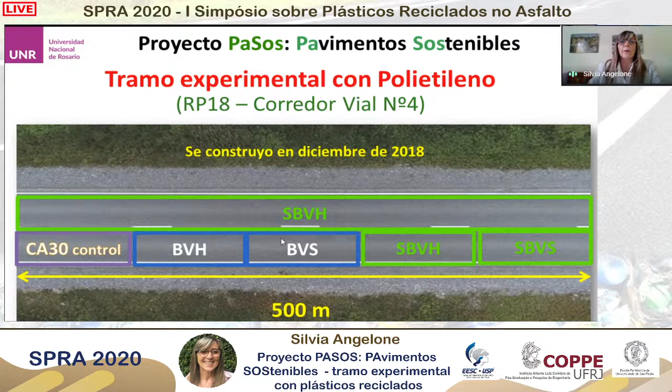Después se hizo un tramo con bidones por vía húmeda, bidones por vía seca, silo bolsa por vía húmeda, silo bolsa por vía seca. La mano esta, que tiene todos los tramos, es la más pesada, la que va con mayor tránsito, la que va hacia la ciudad de Rosario. Y la otra mano, los 500 metros de este otro lado, se hicieron todas con silo bolsa por vía húmeda. Cabe destacar que nosotros no hemos cambiado nada el diseño que tenía originalmente la empresa, sino que lo que cambiamos fue la cantidad, digamos, el tipo de bitumen que estábamos poniendo.

La planta es una planta chica por pastones, tenía un molino a pie de planta para poder modificar el asfalto, terminadora, y teníamos compactadores que después vimos que eran insuficientes, como lo dijeron anteriormente.

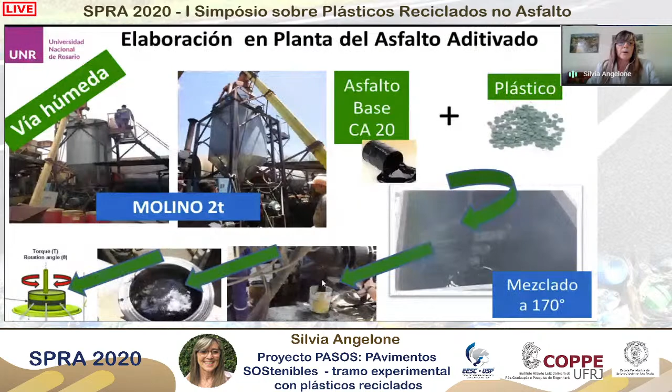¿Cómo se hizo por vía húmeda? Acá tenemos el molino de 2 toneladas, se le ponía el asfalto base, se le agregaba el plástico en pellets, se lo mezclaba a 170 grados con una mezcla, no era una agitación muy grande, y una vez modificado era totalmente bombeable, no teníamos problema de incorporarlo directamente en la planta de mezclas asfálticas. Se tomaban muestras y se hacían los resultados.

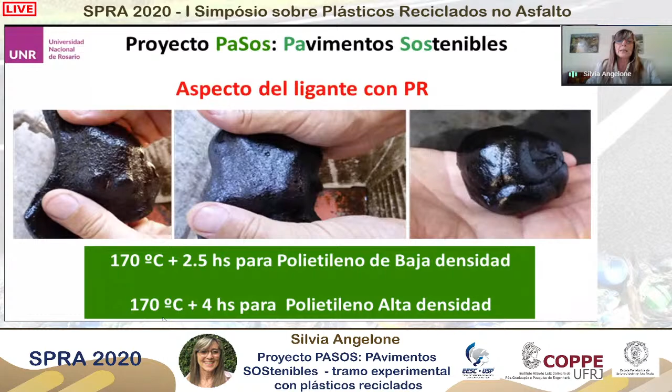Como no sabíamos qué tiempo de agitación le teníamos que dar, lo primero que hicimos fue ir probando, primero a la media hora, a la hora, y así íbamos viendo si estaba totalmente homogéneo o si se veían los pellets. Seguíamos agitando hasta que quedaba totalmente uniforme y homogeneizado. Esto llevó a que el polietileno de baja densidad llevara 2 horas y media de agitación y el de alta densidad llevara 4 horas.

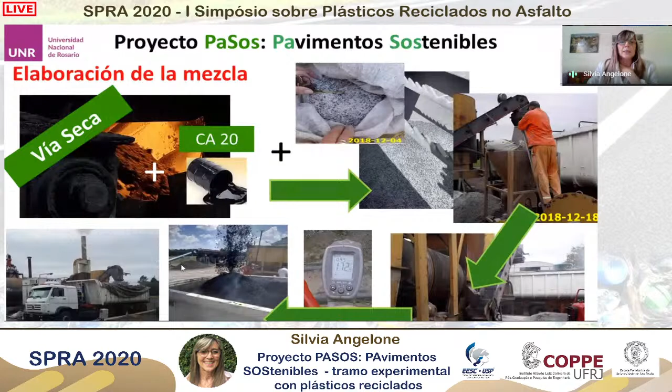Cuando elaboramos por vía seca, se hizo primero la mezcla del agregado pétreo con el asfalto, y la mezcla del filler con el plástico se puso en la tolva del filler, que se incorpora al final. No se le dio más tiempo de mezclado que se le da habitualmente. La mezcla se elaboró a alrededor de 170 grados y estaba totalmente envuelto, totalmente incorporado el plástico a la mezcla. Y así se llevaba a in situ, donde se pudo distribuir bien, se pudo compactar.

Acá tenemos que ver algunas precisiones de la experiencia que hicimos. Es muy importante la temperatura, es importante que no se enfríe, mantener esa temperatura. Una de las cosas que no logramos es que queríamos espesores entre 40 y 50 milímetros y no lo logramos, se lograron espesores más bajos, con lo cual la mezcla se enfriaba rápidamente.

El primer tramo que se hizo fue con silo bolsa por vía seca. Tenían la gente muchas dudas y entonces la última parte del tramo quedó frío y eso hizo que la compactación no fuera tan efectiva.

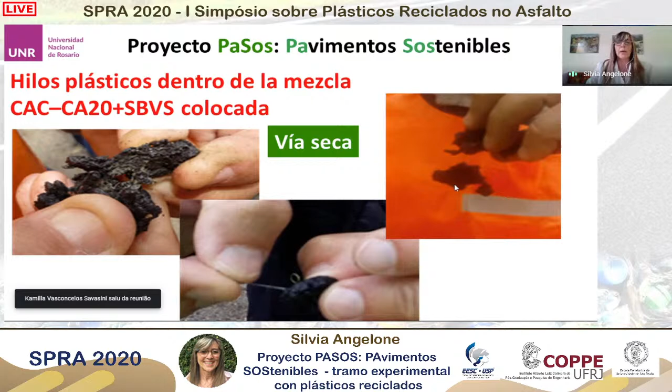Lo que veíamos cuando pusimos la mezcla por vía seca es que tomando la mezcla de la terminadora, uno podía observar hilos del plástico dentro de la mezcla. O sea que en sí no está totalmente fundido, sino que está incorporado dentro de la mezcla, pero no se veían los pellets. Lo que se veían eran estos hilos.

Vamos a ver entonces ahora los ensayos. Dijimos que habíamos hecho silo bolsa, que es de baja densidad, bidones, que es polietileno de alta densidad, y para comparar hicimos lo que teníamos por laboratorio, que es un micronizado. En experiencias anteriores hemos visto que cuanto menor es el tamaño del plástico que se incorpora, este se incorpora más fácilmente tanto al betún como a la mezcla.

¿Cuál es el problema del micronizado? Es que, como dijeron en la presentación anterior, cada etapa es plata, cada etapa tiene un costo. Entonces, micronizar es un costo extra, una energía extra que se le agrega al producto. Por lo tanto, lo ideal sería usar los plásticos reciclados directamente, triturados en forma de escama, nada más que lavados, y ni siquiera en forma de pellets, lo que tiene el pellet es que es mejor para transportarlo, es mejor para incorporarlo en la obra.

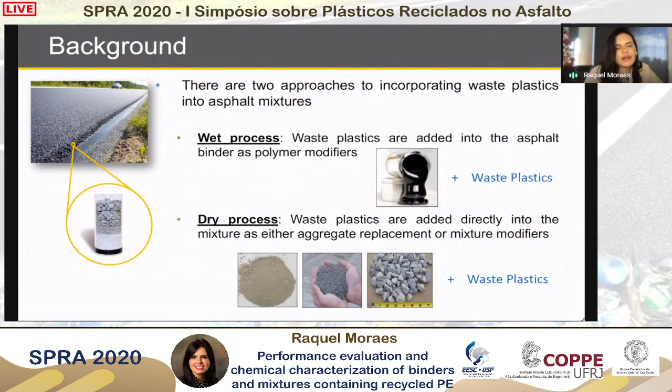So a little bit of introduction. I'm pretty sure that you have been seeing this over and over during this symposium, but I think it's a good way to introduce what I'm going to speak about today. There are two processes where we can incorporate waste or recycled plastics into the asphalt pavement. One is the wet process, where basically we are adding the waste plastics as modifiers to the binder component, and the dry process, where we are adding the waste plastics directly into the mixture as either an aggregate replacement or a mixture modifier. And today, this research will be focused on the wet process.

When we use the wet process for incorporating recycled polyethylene in asphalt, we have some limitations and some challenges. And the most common issue that we face over and over in the laboratory is the phase separation between the two components. And this phase separation happens because of the inherent incompatibility between the two components. And due to this incompatibility, the resulting mechanical properties of the modified binders are affected as well, and therefore the overall performance.

And when we are trying to evaluate this type of material in the laboratory, what we have to consider is this as a pseudo-binary system, where we have two components, and the final performance of the material will therefore be dependent on the intrinsic characteristics of both materials, as well as any chemical and physical interaction that occurs between both components.

So to have an overall picture of why this incompatibility process is so important and so visible in terms of the results and properties that we collect in the lab, we can see here the factors that play a role in the compatibility between the asphalt binder and the recycled plastics. We can see that solubility parameters, thermodynamics, and separation kinetics will dictate the overall microstructure of the asphalt waste plastic systems, and therefore we will see a significant effect on the modified properties of the resultant binder.

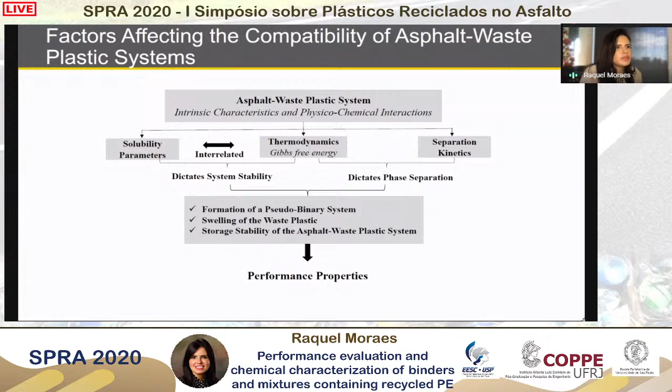The overall objective of this research was to characterize the chemical and the rheological properties of the asphalt binders that were modified with the recycled polyethylene, and also modified with a reactive elastomeric terpolymer, henceforth called RET, that was used as a compatibilizer and performance enhancer of the recycled plastic in the asphalt binder.

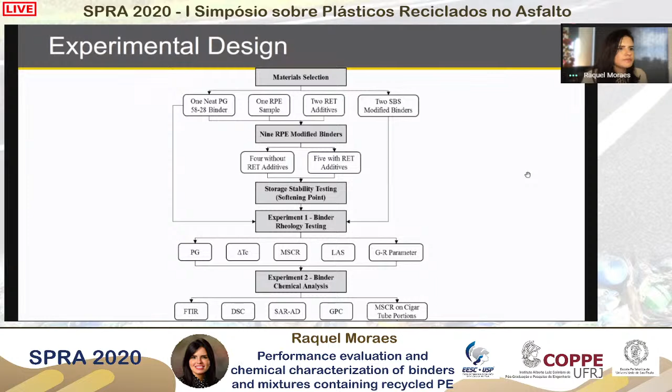Then we have two ethylene-based RET, that is a terpolymer, that were used as compatibilizers to mitigate the phase separation between the recycled plastics and the asphalt binder. And for comparative purposes, in terms of performance, we have two SBS modified binders that were included in the study. One was formulated with 2.4% linear SBS, giving us a final PG of 64-28. And the second one contains 4.2% of linear SBS polymer with a final PG of 70-28.

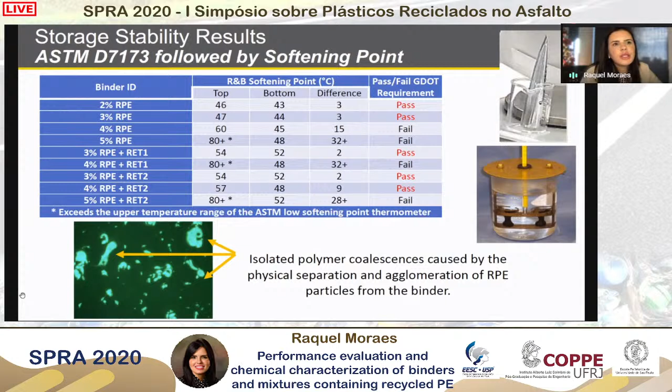And as you can see here in the green picture, we have a UV microscope micrograph, and we can see the very bright green parts that are indicated with the yellow arrow. These are isolated polymer coalescence that were caused by physical separation between the binder and the plastics. And this is for the blends with 5% of recycled polyethylene. So you see, you do not have dispersion of this material within the asphalt binder whatsoever.

And then another way we decided to evaluate, and this was done at WRI, was: okay, we have the cigar tube storage stability test, and before we evaluated using the softening point. But now we want to see something that is not so empirical. Let's rely on the DSR to evaluate the rheological properties of the binder. So we performed the MSCR test on the top and bottom portions after the storage stability test.

And here, as illustrated in the graphs on the left and the right side, you can see that the gray columns are top and the orange columns indicate the bottom samples. We can see that both the neat binder and the terpolymer modified binders had very similar Jnr and percent recovery values for the top and bottom samples.

However, the binders that were modified with the recycled plastics and with the recycled plastics plus the terpolymer showed lower Jnr and higher strain recovery between the top and bottom samples, which is an indication of polymer separation. And also from these results, we can see that by adding the terpolymer to the binder modified with recycled plastics, we can decrease the severity of phase separation, but we cannot completely mitigate the problem.

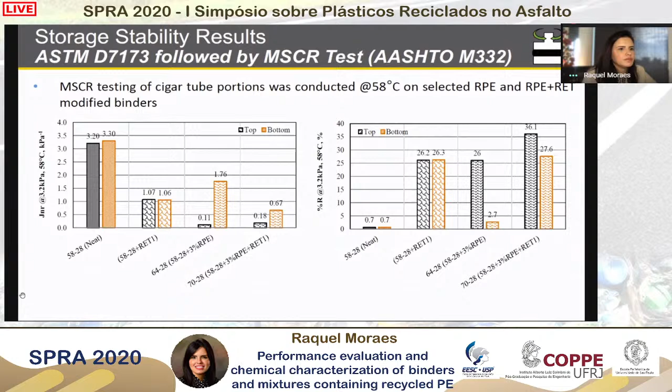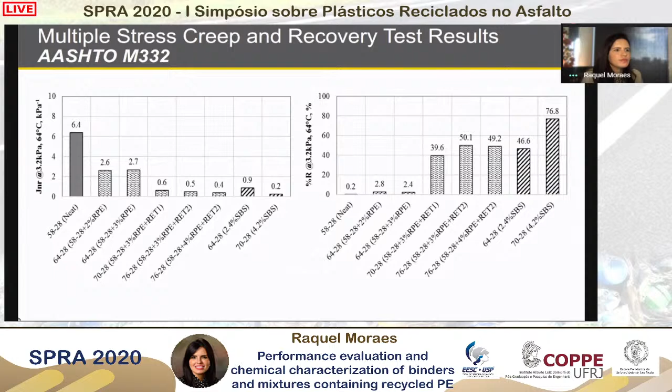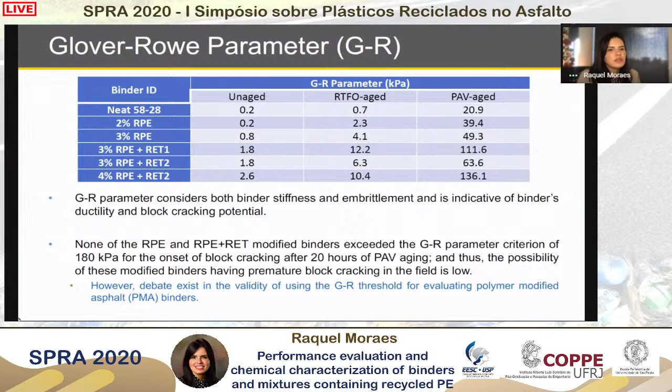And therefore, based on this criteria, we can assume that these binders have a low probability of having premature block cracking in the field. However, we have to have a careful approach on that, because with modified binders, we need to be careful when considering the limits that we have so far.

And here we have the same Glover-Rowe parameters that we show on that table, now plotted in a Black space diagram, where we have complex modulus on the y-axis and the phase angle on the x-axis at 15 Celsius and 0.005 rad per second. We can see that in comparison of the recycled polyethylene modified binders and the recycled plastics modified binders containing the terpolymer, we have similar stiffness, G star, but we have lower phase angle, which then results in the horizontal shift of the data to the left of the diagram.

I'm pointing here in the air, trying to show on the screen.

And again, it's important to highlight that none of the evaluated samples fell within the damage zone. They are indicated by the dashed and bold line. And on the right side, we have an aging index calculated considering the Glover-Rowe parameter, considering the short-term aged binders and long-term aged binders.

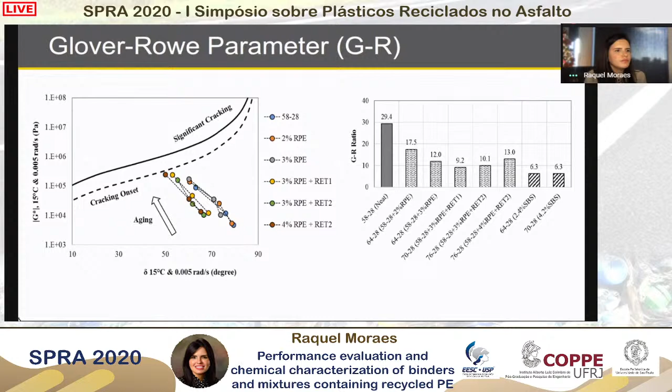And then we move forward with the differential scanning calorimetry, the DSC results. What I'm going to be presenting from the results that we captured using the differential scanning calorimetry is the crystallization. And why is this so important? Well, we know that when we have materials that have a high wax content, we have very different rheological performance. And by adding the recycled plastic, we can be increasing the overall resin content in the binder, therefore increasing the content of wax and changing completely the rheology of the material.

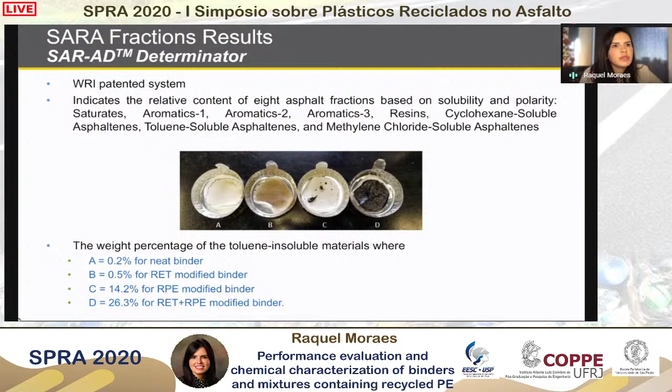So from these SARA results, as I mentioned previously on the picture, we have in the last columns the content of insoluble materials, where we can see that a significant portion of the blend that contains the recycled plastics is considered insoluble. And then we can see the overall SARA fractions for all of the 4 binders. But one thing that is important for us to see is that these results could be used as an indication that the storage stability test alone does not directly represent the evaluation of the chemical compatibility of

the polymer modified binders. You remember that these samples were selected after initial screening of the storage stability test using the softening point, where we see that the binders passed the initial screening in accordance with the Georgia DOT specification. But when we come to a more detailed or more intrinsic evaluation of the material, we can see that test does not cover everything, as we can see here from the amount of insoluble materials that we have in the blends with the recycled plastics.

Let me run. So as we can see over here, by the overall molecular size distribution curve, the modified binders are showing a lower overall molecular size distribution in comparison with the base binder, which we know is unrealistic because of the molecular weight of the polymer that is being added to the binder. So care needs to be taken when we're doing analytical analysis of the material modified with recycled plastics, since the solvents that we use for evaluation cannot completely dissolve the recycled plastics.

And then another evaluation that we made with this material was using the binder bond strength test to evaluate compatibility with aggregate and also moisture susceptibility. And here's a schematic of the BBS, and since I'm running out of time, I'm going to try to move fast through the results.

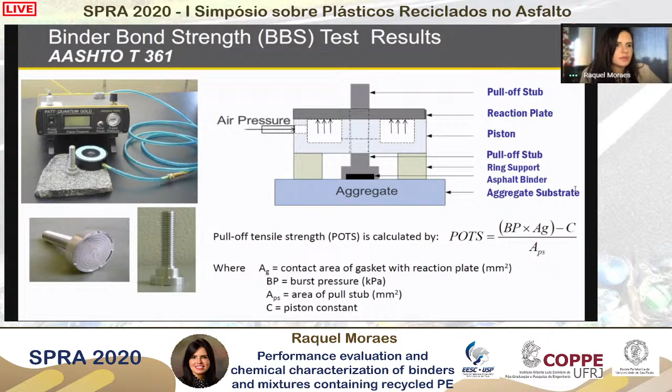The first results that we have over here are the effect of aging on the bond strength of the recycled plastics. We have POTS results that were collected with the BBS unaged, that is original binder, and after PAV. And we can see that a higher POTS value, or a higher bond strength, is observed after oxidative aging. One explanation for that is the carboxylic acids that are present in the asphalt binder, which are increased because they are products of oxidation, and they are quite polar.

Modifying binders are showing smaller dry bond strength. We evaluate the BBS after the samples, submerged in a water bath for 48 hours, before and after aging. We can see a significant decrease in bond strength before and after aging, when considering moisture conditioning.

This is because the carboxylic acid groups developed with oxidation are favorable for the dry state, but unfavorable when we consider moisture conditioning, since they can be removed very easily in the presence of water. This effect is more accentuated for the binders modified with recycled plastic by itself.

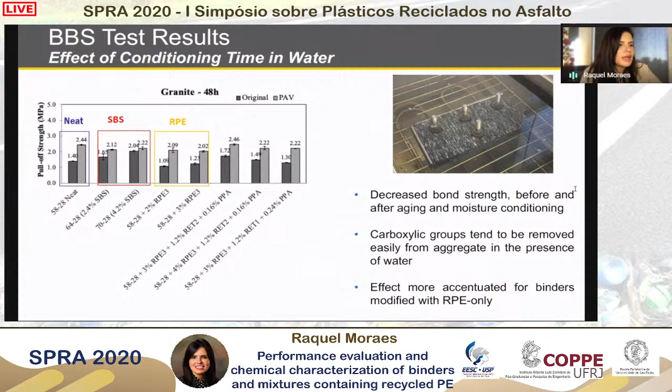We also can see here the overall loss of bond strength, meaning the ratio between before and after moisture conditioning. Samples containing recycled polyethylene by itself are more susceptible to moisture damage after oxidative aging, compared with samples modified with the terpolymer.

Samples containing the terpolymer contain PPA, polyphosphoric acid, used as a catalyzer in this blend. PPA is known to react well with granite aggregates, therefore improving the overall moisture susceptibility of this type of blend.

We also evaluated the relationship between the BBS results and FTIR, where a higher loss of bond strength was observed for binders with higher carboxylic and sulfoxide area, as mentioned before. This effect was much more accentuated for binders containing recycled polyethylene by itself.

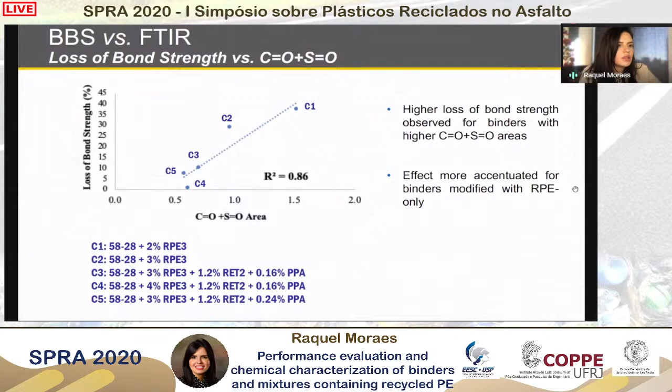So the overall conclusions of the experiment, briefly: a higher percentage of recycled polyethylene will not give us a passing criterion according to the Georgia Department of Transportation, and softening point testing results after storage stability can be misleading.

Therefore, the MSCR test is a more reliable way of evaluating polymer separation after cigar tube storage stability.

We can see that with 2 and 3% recycled plastic, we increase the stiffness of the binder overall, and therefore the overall rutting resistance, but no positive effect was detected regarding low temperature cracking and fatigue cracking.

The DSC test was found to be a useful tool for evaluating recycled polymer modified binders, where we can detect melting temperature, glass transition, and the amount of crystalline fractions.

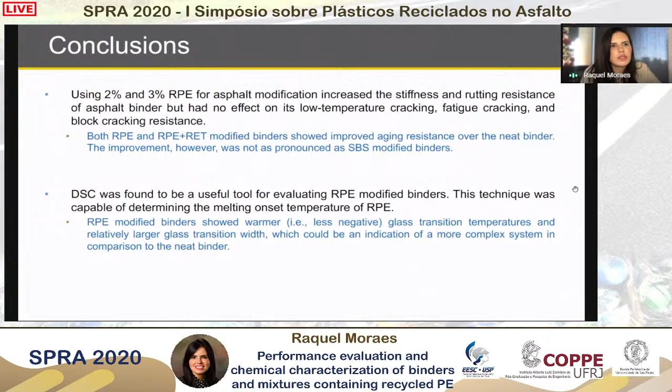Lastly, I'd like to mention another very interesting study we just finished. In this study, the recycled plastic was not added to the binder directly, it was added to the mixture through the dry process.

We wanted to evaluate whether, even when recycled plastic is added using the dry process, this would have any impact on the rheological properties of the binder. That's what the study was aimed to achieve.

Our hypothesis was that the interaction existing between the asphalt binder and the recycled plastic can affect the overall performance of the mixture, even though it's constructed using the dry process.

The whole hypothesis is that during mixing, the aggregate shear motion will result in incorporation of the recycled plastic into the asphalt binder, and the degree of this interaction is unknown.

But if an interaction exists, it will result in changes to the rheological properties of the binder that could be captured after extraction and recovery.

One concern everyone has is regarding the solubility of the recycled plastic in solvents commonly used, and our capability of recovering the recycled plastic during the extraction and recovery process.

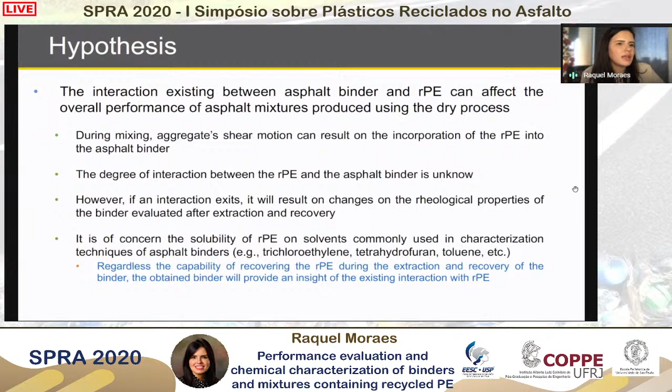For this experiment, we used the exact same recycled plastic discussed previously in the binder and chemical analysis. You can move forward, Jack.

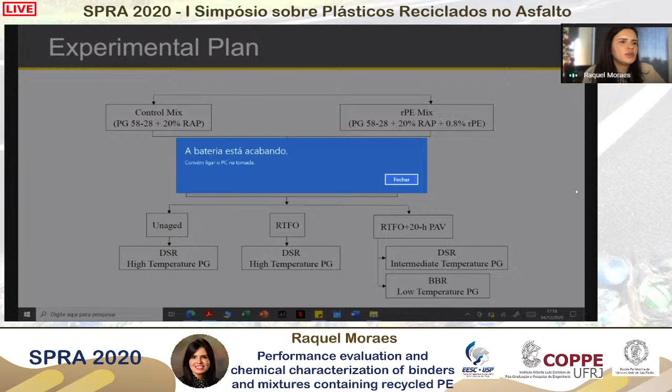Here we had a control mix, a PG58-28 binder containing 20% RAP, and a recycled polyethylene mix containing a PG58-28 binder, 20% RAP, and 0.8% recycled polyethylene. From these two mixes, we used extraction and recovery to obtain the binder.

From the resulting binder, we evaluated the material as unaged, RTFO, and long-term aged on PAV, and I'm going to discuss the results.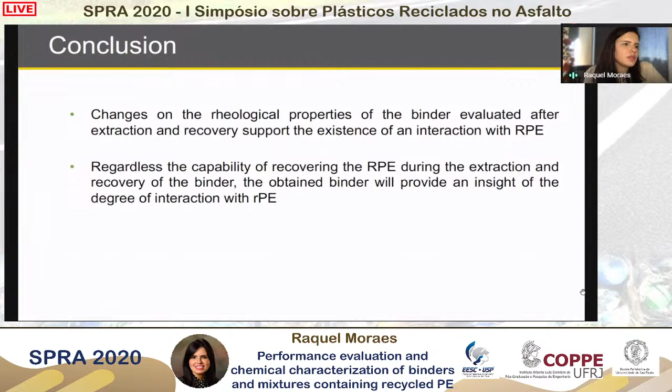Therefore, we can conclude that the change in the rheological properties of the binder, evaluated after extraction and recovery, supports the existence of an interaction between the recycled plastic and the virgin binder, even though the incorporation of the plastic was through the dry process. Regardless of the capability of recovering this recycled plastic during the extraction and recovery of the binder, the obtained binder will always provide insight into the degree of interaction with the recycled plastic. And with that, I conclude today's presentation, and sorry if I went over the time.

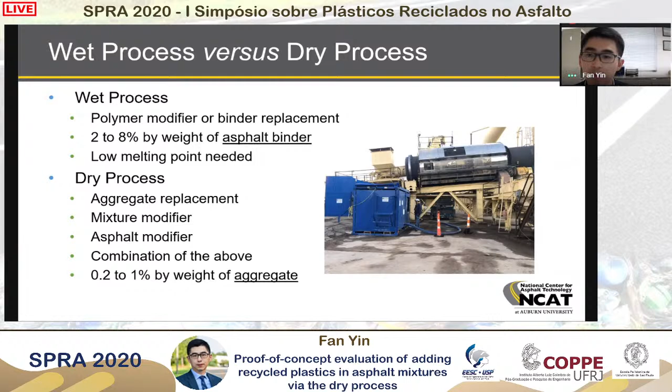Overall, the dry process can accommodate more recycled plastic for use in asphalt mixtures. I'd say India is definitely the leading country on using the dry process of adding recycled plastics. Reportedly, they have almost 15 years of experience with this process, using LDPE, HDPE, and PET in this type of application.

The concept they are pursuing with the dry process is what they call plastic-coated aggregates. This means adding recycled plastic into the hot aggregates. Because of the high temperature, the plastic melts and coats the surface of the aggregate. By doing that, they can improve the mechanical properties of the aggregate, including increased toughness and abrasion resistance, and the plastic films can also reduce water absorption and asphalt absorption during mix design.

There's literature showing that plastic-coated aggregate can improve mixture resistance to rutting, moisture damage, and fatigue damage. We talked with some contacts over there, and it seems they have constructed over 1,500 miles of local roads with this technology. But the long-term performance data of those field projects remains to be determined. About 7-8 years ago, the Indian Roads Congress established a specification focused on the dry process of using recycled plastic in asphalt.

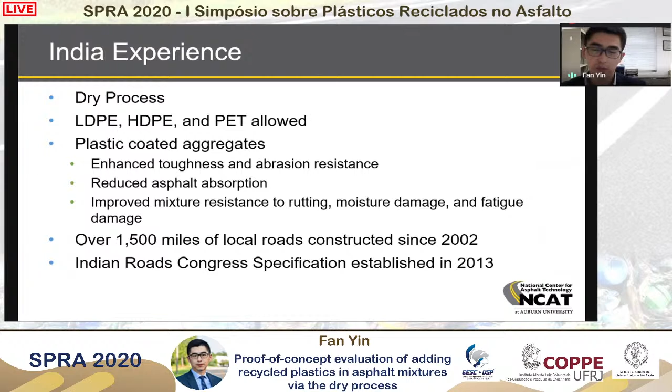So what happens to the mixture when we add plastic into the mix using this dry process? Through literature review, we found that many researchers use Marshall stability as the performance measurement of pavement performance. Those studies consistently show that adding recycled plastic can increase the Marshall stability.

Based on this observation, some researchers have indicated that, because of higher or increased Marshall stability, adding recycled plastic can provide longer lasting pavements. But we know this conclusion may not be well supported, because based on research done over the last 20 to 30 years with Marshall stability, we know there isn't a really good correlation between Marshall stability and rutting resistance in the field. Even if there were a good relationship, one thing not considered is the cracking performance.

Right now in the US, cracking is a primary form of distress in asphalt pavements. So we definitely need to address durability and cracking resistance of the mixture to make our pavements last longer. There's quite a bit of research looking at stiffness and rutting resistance, and it all shows a positive impact from adding recycled plastic on those properties.

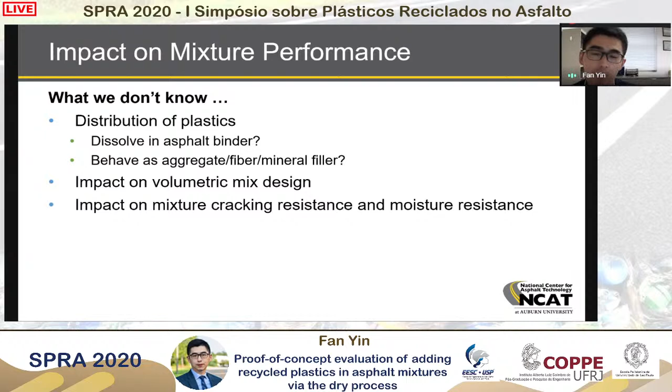Durability when we talk about the performance of asphalt pavements. But there's not lots of research on that perspective. And also we need to look into the surface friction and texture characteristics of asphalt pavements when we add recycled plastic into the mix. And finally, what kind of impact those plastics have on the pavement structure design.

We talked with the French contractors who have experience with adding plastics using the dry process. They're saying that by adding plastics, they can produce these high modulus plastic modified mixtures that can potentially reduce the pavement thickness. But there has not been comprehensive research to verify or to quantify those structural benefits. So with those questions in mind, we did a small study here at NCAT, a proof of concept type evaluation to understand the dry process.

This is the same material, the post-consumer polyethylene material that Dr. Moraes mentioned earlier in the study that we did for the Plastics Industry Association. It's pretty much like LDPE with a little bit of contamination of HDPE. The mix design we use is a very typical mix design that we have been using on the NCAT test track, a 9.5 millimeter surface mix with PG 58-28 binder, 20% RAP content, which is about the average RAP content used in the United States.

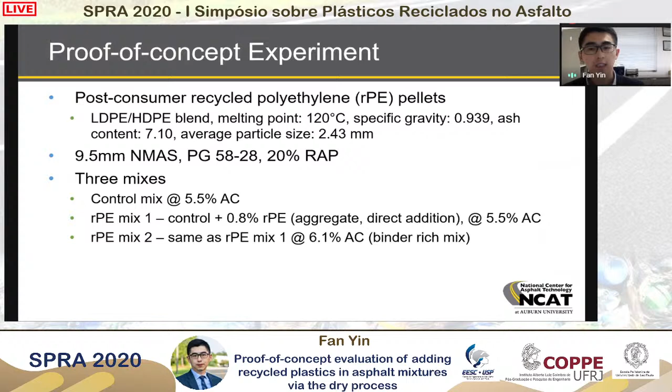When we do the mixture testing, we look at three different mixes: the control without the plastics, and then two mixes with plastic. The first one is we took the control and added 0.8% plastics by weight of aggregates using the direct addition approach, and we keep the binder content the same, 5.5%. The second mix with plastic is pretty much the same as the first RPE modified mix, but the only difference is that we're adding more binder to make it a binder-rich mix so that it can provide better cracking resistance and durability.

I know the dosage of plastic can be very confusing. In this case, we are talking about by weight of aggregates. But if you want to convert to the weight of binder, using total weight, it's a little bit less than 14%. But if you're using the new binder or the virgin binder, it's almost 17%. So it's definitely a much higher dosage as compared to the amount of plastic we can add in the wet process.

The first thing we did is what we consider the aggregate coating trial. This is kind of trying to simulate the research findings reported from India. So what we did here in the lab is we preheat those aggregates overnight at very high temperature, like 340 to 370 degrees Fahrenheit, the typical mixing temperature that we have been using. And then we add those RPE pellets into the aggregate. But those plastic pellets were not preheated. They were stored at room temperature, and they were just dropped into the bucket with hot aggregates. And then we do a dry mixing without adding binder. And depending on different times, we look at what kind of interaction happened between the plastics and the aggregates.

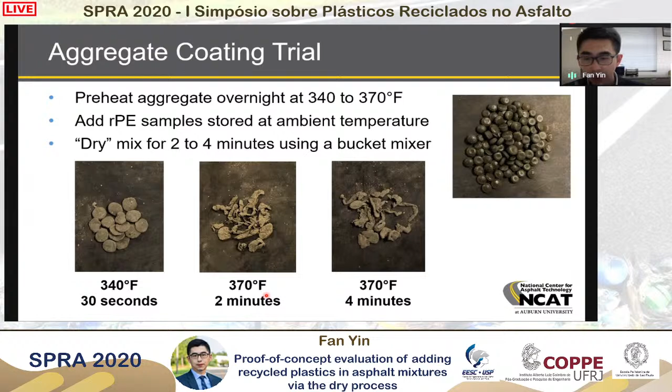So very interestingly, this is what we found. After mixing the aggregate with the plastic, we can separate the plastic particles from the batch. Right now I'm showing three pictures. The one on the left is a relatively lower temperature, 340, and dry mixing 30 seconds. The one in the middle is 370 degrees Fahrenheit for the aggregate temperature, but mixing for 2 minutes. And finally, on the right side is the same temperature, but we extend the mixing time to 4 minutes.

So the whole idea I want to show with this picture is, as we can see here, for all these three mixing conditions that we tried in the lab, the plastics were deformed because of the shear action applied to those plastics by the aggregate in the bucket mixer. But none of those mixing conditions was able to completely dissolve or melt the plastic so that it can provide the coating of the aggregate. So we were really not able to duplicate the aggregate coating experience that's reported by the researchers in India.

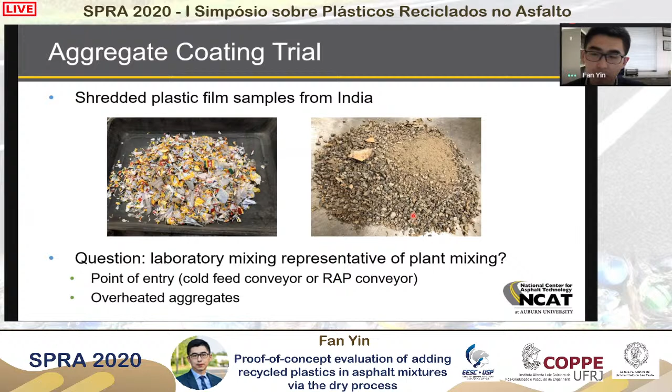After the dry mixing experiment, we looked into the volumetric properties. So I'm showing the 3 mixes I mentioned earlier, and those are the air voids at N design based on the drum mix formula. So the whole point I want to make here is if we look at this air void number, for the control mix at N design, we got 4.5% air void. But adding 0.8% polyethylene pellets into the mix reduced air void by 1%.

I know air void is still used by many agencies not only for mix design approval, but also for production acceptance. So if that's the case, we definitely need to be cautious about the impact on those volumetric properties provided by the recycled plastics. In terms of the other volumetric properties that are related to durability, VMA and VBE, those are important things that agencies always look at to make sure that the mix is durable.

In this case, if we look at the VMA, all these calculations in the middle part of the table, we are treating the plastic as aggregates. And then we adjust the Gsb number of the combined aggregates. And then we do the calculation for VMA. In this case, the VMA also dropped by 1%.

And if you do the difference between air void and VMA, we got the VBE. And then those 2 numbers are pretty much the same, which makes sense since we did not change any binder content in the mix. And there was no binder absorption difference. So that's why they have very similar VBE numbers.

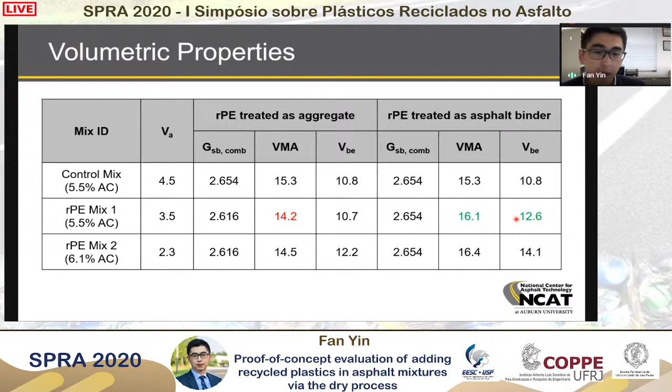This is a picture of the gyratory specimen that we made in our lab, and we just used a wet saw to cut it into pieces to look at the cross section. As we can see here, there's lots of discrete plastic particles that stay outside the binder phase. So we know, just looking at this picture, not 100% of the plastic goes into the binder. And the reality may be that the majority of the plastic may stay outside the binder.

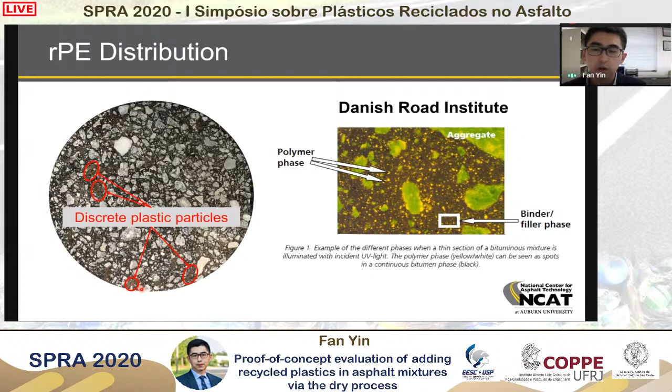There's some research done by the Danish Road Institute. They use the same mixture slides to look at the distribution of the plastics, and that can be a good way to further quantify the distribution of the plastic in the mixture phase.

Dr. Morris mentioned the challenge of working with recycled plastic, especially in this case polyethylene, with some of the asphalt solvents. They are really not soluble. We looked at different solvents in one of the studies. We worked with WRI, and we realized this is something that we need to be careful about when we do any binder extraction or recovery.

But the interesting part is the same experiment that Dr. Morris mentioned before, that we can use solvent extraction in addition to the ignition oven to understand how much of the plastic goes into the binder and how much of the plastic stays outside the binder. So the first thing we do is the extraction and recovery. In that case, all the plastic particles that stay in the solid phase are going to be washed out by the solvent together with the aggregate.

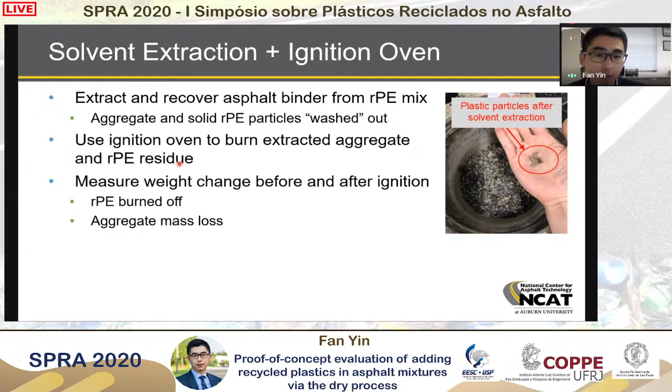And then we can use the ignition oven to burn the extracted aggregate and the plastic residue, and measure the weight change before and after. Based on that, we can estimate how much plastic goes into the binder and how much stays outside the binder. In these small experiments, based on our calculation, we found that only 10% of the plastic added into the mix was able to dissolve into the binder, while the other 90% remained in the mixture phase. So this definitely provides some information about what role recycled plastic plays in the dry process.

And then we did a mixture evaluation to look at rutting resistance and moisture resistance using the Hamburg, IDEAL-CT cracking to look at intermediate temperature fatigue, the E-star to look at stiffness and viscoelasticity, and also the AMPT cyclic fatigue test to look at the fatigue damage characteristics of the mix. With E-star and the cyclic fatigue, we can do performance prediction modeling using the FlexPAVE analysis.

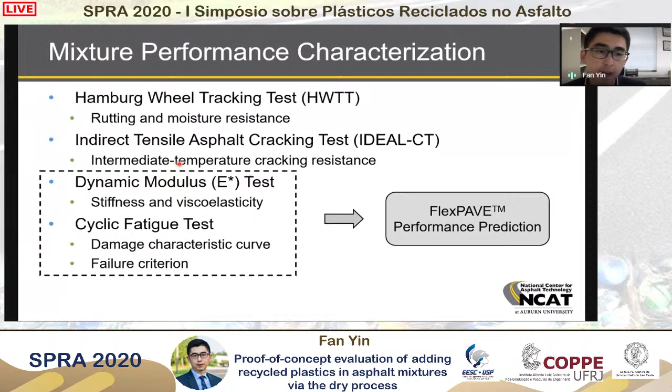In terms of Hamburg analysis, I'm showing the two approaches that we have been using. On the left side is the traditional way, where we look at the total rut depth and the stripping inflection point. On the right side, we look at the alternative approach so that we can separate the rut depth caused by rutting versus rut depth caused by stripping. In this case, we are using a corrected rut depth and stripping number as the parameters.

So now if we look at the results here, those are the same three mixes I mentioned before. I'm showing two rutting parameters. For both parameters, a lower number indicates better rutting resistance, so keep that in mind. As we can see here, no matter which parameter we're looking at, the mixes with the plastics have a much lower corrected rut depth or total rut depth. That indicates better rutting resistance, which agrees with the high temperature binder rheological properties that Dr. Morris mentioned before, and also agrees with research that has been published in the past.

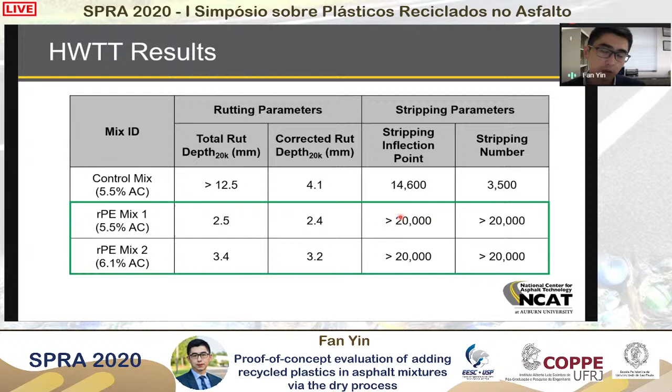Another part we can get from the Hamburg analysis is the stripping, or the indication of moisture resistance. In this case, the control mix showed stripping in the Hamburg. Some fine aggregate got stripped out, separated from the binder due to adhesive failure, but we did not see that in the plastic modified mixes. So in this case, we think that the plastic modified mix provides better resistance to moisture damage compared to the control mix, at least when we do the evaluation using Hamburg.

For the cracking evaluation, we look at IDEAL-CT. This is probably one of the most popular cracking tests used in the United States under the framework of balanced mix design. This is very similar to the way we run the TSR. It's an indirect tensile test. We apply the load in the vertical direction, and we measure the load versus displacement.

When we do the TSR, we only look at the peak number. But in this case, we look at the entire load versus displacement data, and we consider the fracture energy and the post-peak slope, and by considering all these parameters, we calculate the final cracking index parameter called CT index. A higher number indicates better cracking resistance at intermediate temperature.

Now, if we look at the results for the IDEAL-CT, we look at two aging conditions. We definitely recognize the importance of asphalt aging on the cracking evaluation, so we look at the short-term aging and long-term aging conditions in the same test. Once again, there are three mixes, the same mixes we have been using in this example. For each mix, the blue bar is the short-term aging and the orange bar is the long-term aging. So this one is the control.

The second one is the plastics without changing the binder content. And then the one on the right side is a plastic modified mix at higher binder content. So very interestingly, from this data, we can tell that the two mixes on the left side did not show much difference at both aging conditions. But the one at higher binder content gave us a much higher CT index, which indicates better cracking or durability

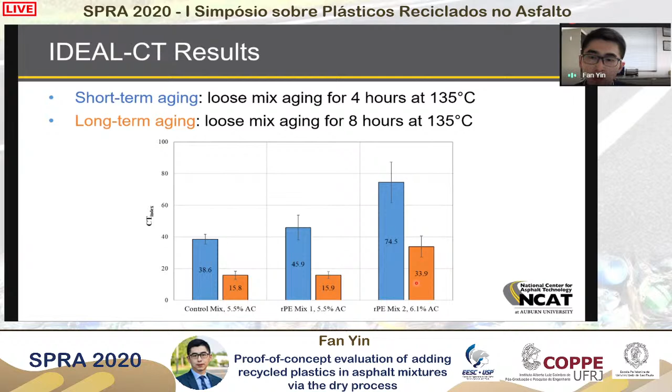When we look at the dynamic modulus test, we look at the E-star master curve, and we also look at the Glover-Rowe parameter when plotted on the black space diagram. In this case, adding the plastic did not change the stiffness of the mix, which is also surprising to me, given the Hamburg data we showed before.

But when we just look at the master curve, one thing we were not able to capture is the phase angle. But when we look at the data on the black space, it gives us a better indication of the mix behavior. So this is very similar to the way we look at the binder Glover-Rowe parameter. We have stiffness on the y-axis and the phase angle on the horizontal axis. So not only does it give an indication of the mixture stiffness, but also we can consider the brittleness of this

mix. And in this case, if we look at the location of those two data points, the orange is with the plastics and the blue is the control. So as we can see, the one with the plastic has a much lower phase angle when we test it in E-star, which indicates a little bit increased embrittlement.

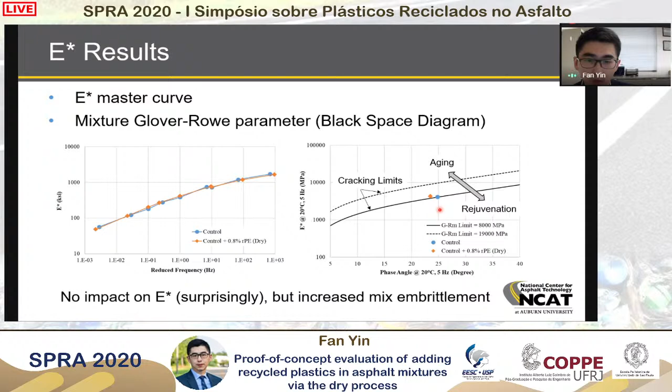I'm showing the arrows that we typically see with the impact of aging and rejuvenation. So in this case, there was not much increase in the stiffness, but definitely adding plastic makes the mix a little bit more brittle. And that will affect the fatigue resistance when we look at cyclic fatigue data, as I will be showing in the next slides.

And then finally, we look at the cyclic fatigue analysis. I know we are running behind, so I don't want to spend too much time talking about the theory behind these. But this is a test that uses a viscoelastic continuum damage model. And we got a C versus S curve, which gives a relationship between the pseudo stiffness versus damage. And also we can look at a cracking index parameter called Sapp. In this case, a higher number indicates better fatigue resistance.

Now getting into the results, when we look at the index parameter, as we can see very consistently, adding the recycled plastics, the mix has a much lower Sapp number, which indicates a reduced fatigue resistance. And we saw the same trend when we look at the pseudo stiffness versus damage. If we look at any given damage and we draw the line here, the one with the plastic has a much lower pseudo stiffness as compared to the control mix, which agrees with the Sapp number indicating reduced fatigue resistance.

And very interestingly, our engineer working in the lab running the test showed me this picture. As we can see here, there are some plastic particles that we can identify just based on visual observation that occur at the cross-section at the failure point within the specimen. So it definitely affects the behavior of these mixes when we run the test.

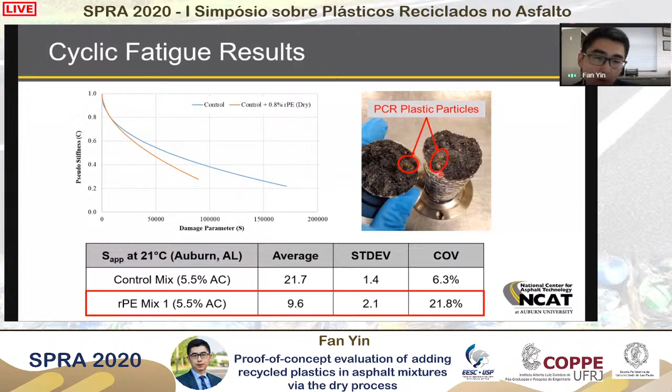And finally, we use all these results to do the FlexPAVE analysis to predict the fatigue performance in the pavement structure. In this case, we were looking at the bottom-up fatigue cracking as the main mode of distress in evaluation. When we do the prediction, we fix the pavement structure for the control section.

We adjust the thickness of the plastic-modified mix section to try to match the equivalent damage due to bottom-up fatigue cracking. Based on our simulation results, we found out that we need 7 inches of the plastic-modified mix to be able to provide the same damage resistance as the control mix using only 5 inches of hot mix asphalt. This is related to the reduced fatigue resistance of the plastic modified mix, so we need to increase the thickness so that we can reduce the strain at the bottom of the asphalt layer so that it can improve the fatigue resistance.

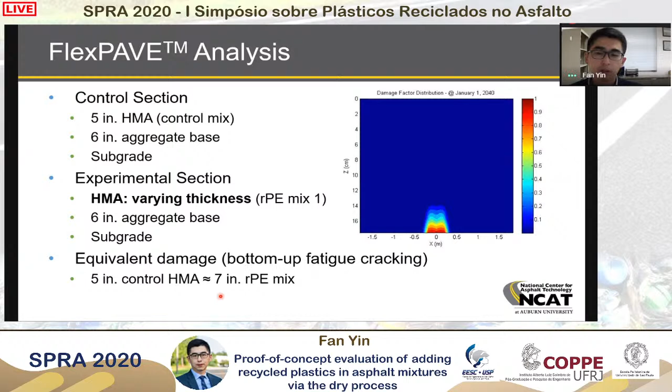Finally, a quick summary of what we found so far. We looked into the aggregate coating approach, but we were not able to duplicate what has been reported in literature. When we look at adding 0.8% of recycled plastic, we realize it definitely reduced the air void. This is something mix designers need to be cautious about. And also, when we report those VMA and VBE results, we need to be very careful because depending on what kind of Gsb number we are using, the VMA and VBE results may not be entirely reliable.

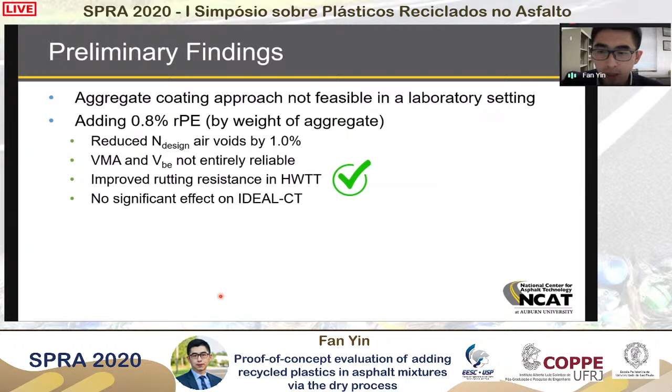In terms of rutting resistance, we saw improvement on the high temperature behavior, which is a positive sign. We did not see any significant impact on IDEAL-CT. But when we look at the AMPT cyclic fatigue and also the FlexPAVE predictions using the bottom-up fatigue damage model, we realize adding plastic can have a negative impact. And also, similar research findings have been reported earlier this year at TRB. There's a workshop, a presentation by Colas Solutions. They also reported their result on the dry process, which agrees with the findings we have here.

Once again, this is a very small scale proof of concept type evaluation, but here at NCAT, our research team learned a lot from this. But moving forward, I think more research is definitely needed. I think Dr. Richard Willis mentioned this morning the NCHRP project, and that can be good research to look further into the dry process.